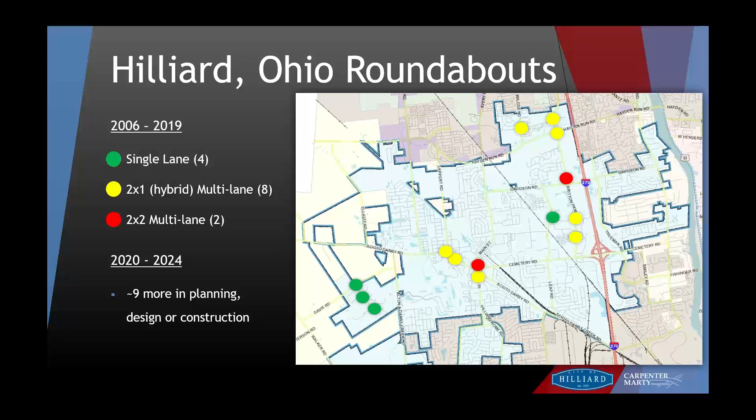So I want to take a second to look back here in the United States. The first modern roundabouts in the US were built in the early 1990s, and the first roundabout guide, published in 2000, was based heavily on either international experience or very limited US experience. But roundabout guides take a while to research and write, so by the time they're published, there's probably new information out there.

In Ohio, our Manual of Uniform Traffic Control Devices, the 2005 edition, actually had very little information in it about roundabouts. So when I look back, we first started dipping our toes into roundabout design around 2004, and a lot of the guidance we were working off was probably already outdated.

Fast forward to 2010, when NCHRP Report 672 was published, the second edition of the Roundabout Guide. Again, the information in that published document probably still had very limited experience and data for some of the more complex roundabouts we're starting to see now.

And again, the OMUTCD 2012 edition—we're really lucky to have a lot more information in there, some great updates on roundabout design guidance. But it's really important that we never use these guides as prescriptive, as in 'do these things a certain way,' because roundabout guidance is constantly evolving. We all need to stay up on what's going on, what research is happening, and talk with each other. These webinars are great opportunities to do that, and to always be making changes in how we do things to do a better job.

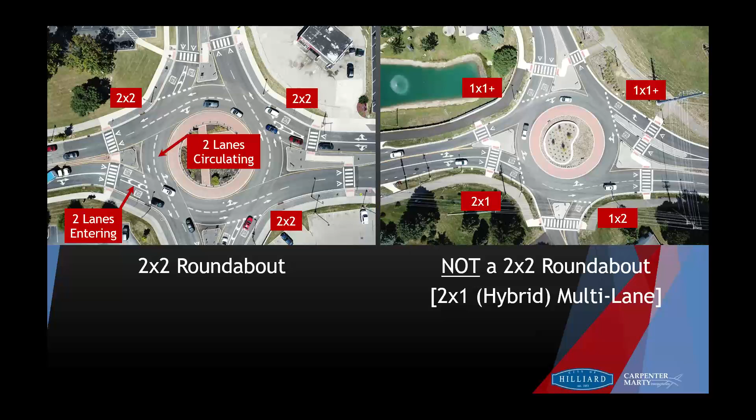Roundabouts are a safer choice. I think most of us on this webinar probably very much believe in this. I absolutely think that when you look at trying to create a more forgiving infrastructure for people making mistakes on the road, roundabouts are the way to go. We know they slow people down if designed properly, and we know the angle of impact is much more forgiving. For us, it's a no-brainer.

But when you think about what the public sees sometimes, they're not always differentiating between a single lane or a multi-lane roundabout. They tend to lump them into a good roundabout or a bad roundabout. Early on, there were always these safety stats saying roundabouts reduce crashes by X%. But I think a dirty little secret a lot of us weren't really talking about maybe 5, 6, 7, 8 years ago is this crash problem we're having at some of these multi-lane roundabouts.

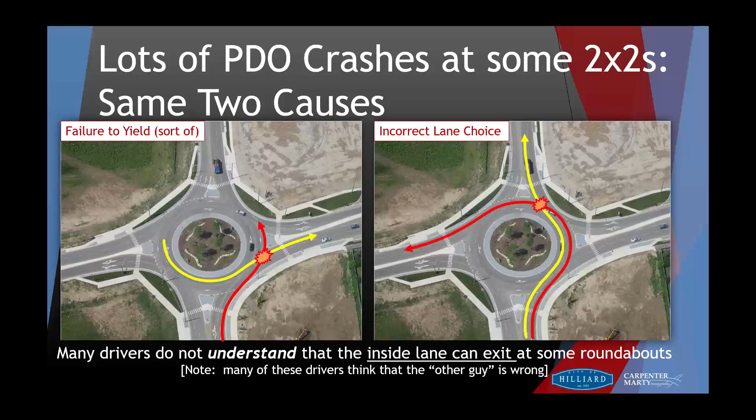This crash problem is actually part of a big research project going on right now. Some of you may have listened to the webinar on Tuesday with Dr. Wei Zhang from FHWA and Justin Bansen, part of the research team with Kittelson. They talked about the pooled fund study. I won't get into that too much, but what we know is that not all 2x2 roundabouts are high crash, but most high crash roundabouts are 2x2s or bigger. So what they're trying to dig into is whether there are commonalities in high crash versus non-high crash 2x2s, to help all of us make good decisions on whether we're setting ourselves up for success or potential failure.

So I'll recap here. Our Metropolitan Planning Organization, MORPC, used to put out a list every year of high crash intersections, the top 100 in our entire region, and they'd also divvy out the top 5 for each community within our MPO. These three roundabout intersections were in the top 100, and our number one location was actually the second highest frequency in terms of crash rate in our entire region. But the great thing is it was the lowest severity. So there are some really good stories here, but having a really high crash rate is not where you want to be.

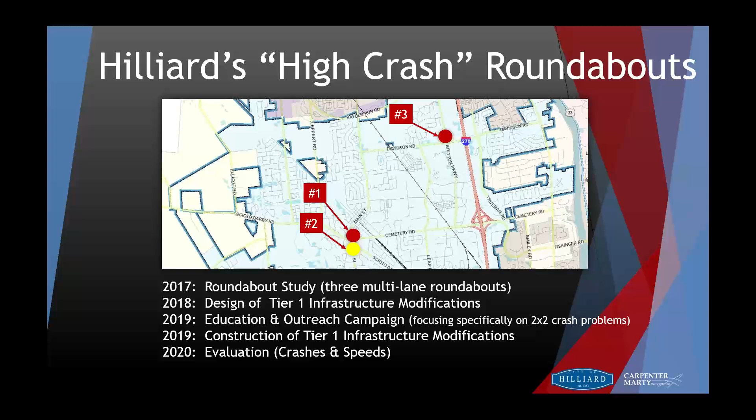Back in 2017 we conducted a detailed study of these three roundabouts, came up with some recommendations for infrastructure modifications, which we designed in 2018. In 2019 we really kicked off a significant education and outreach campaign in our area, and then constructed tier 1 of these infrastructure modifications at all three roundabouts last summer and fall. 2020 is where we are today, and we've been evaluating both crashes and speeds at these roundabouts to see whether our investment was worth it.

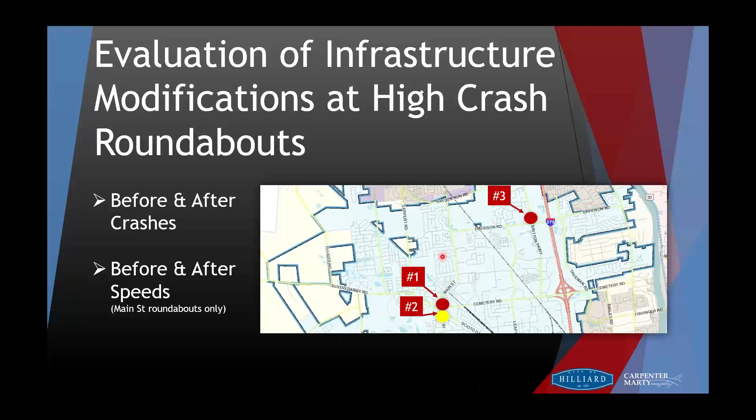I'll talk a little here about that evaluation of the infrastructure modifications at our three high crash roundabouts, looking at before and after crashes as well as before and after speeds at our Main Street roundabouts, which are number 1 and number 2.

What we did here is actually a ghost line—Minnesota DOT may have done something similar to this. It's basically a ground-out, almost like a grind line, to re-emphasize that the inside lane can exit out.

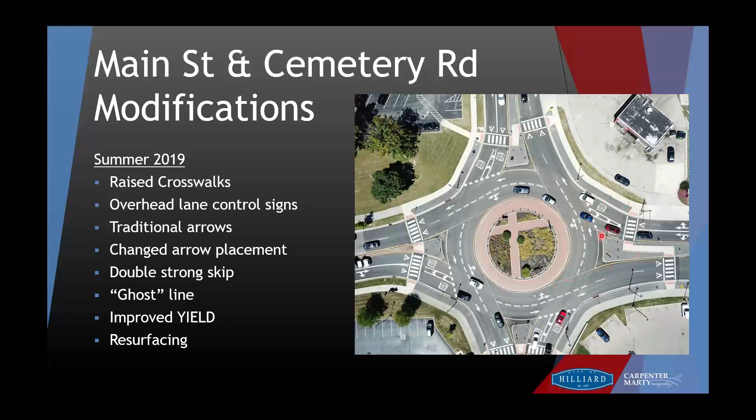We also changed our yield line placement. Through August 31st of 2020 we saw a decrease in crashes, though the first month had some increase. Even before COVID we were seeing a pretty significant decrease in our crashes. We do think there's probably a COVID impact—our volumes are down, our crashes are down citywide—but even factoring that in, we still showed a fairly significant reduction in crashes.

Now I'll go through speeds. These speeds were taken at the entry in advance, and then at the exit from the circulatory roadway, with 85th percentile speeds measured at the exit lane crosswalks. We did place the zigzag crosswalk markings a bit further out, because that seems to be the sweet spot for motorists yielding at the crosswalks. That was our goal.

These speeds were taken in May 2017 during our study, before the infrastructure improvements. These are the same location speeds in May 2020, about 9 months after we made the improvements, and the change is shown here. For those of you who work with 85th percentile speeds, when you have a lot of traffic sustained over a 9-month period, we're pretty pleased with what we did. That said, if you've driven through these roundabouts, you know the raised crosswalks definitely get your attention.

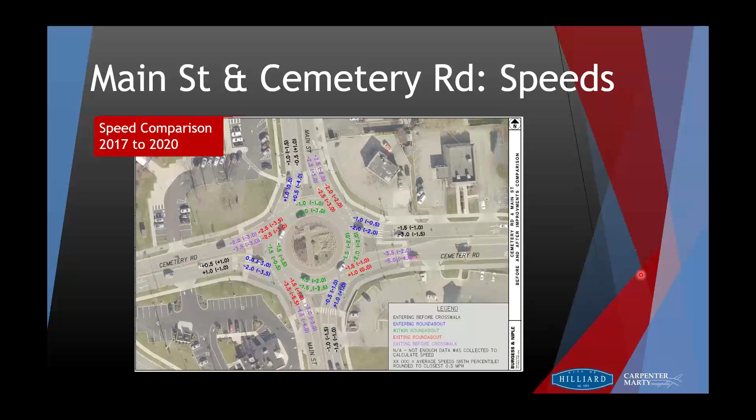I'll talk a little bit more about that later.

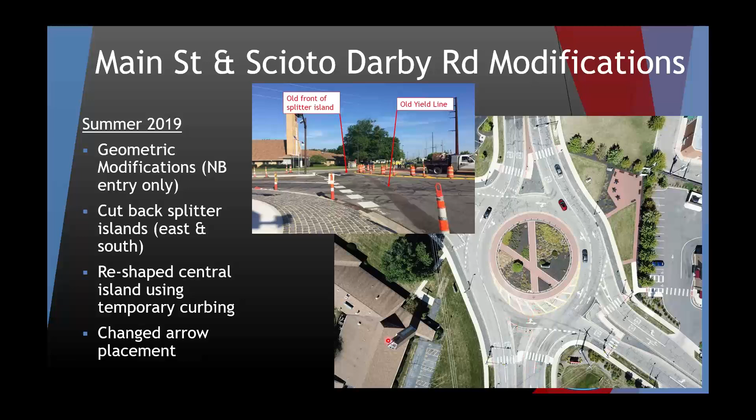So we made these geometric modifications using quick curb. We cut back the south splitter island to try to widen it enough, and it had a pretty significant effect. If you look at the northbound crashes, northbound to eastbound coming into that leg, they actually went down really significantly, since some of the other crashes we've had are at other locations along that roundabout. Not expecting significant change there, but that's really where we're seeing some improvement.

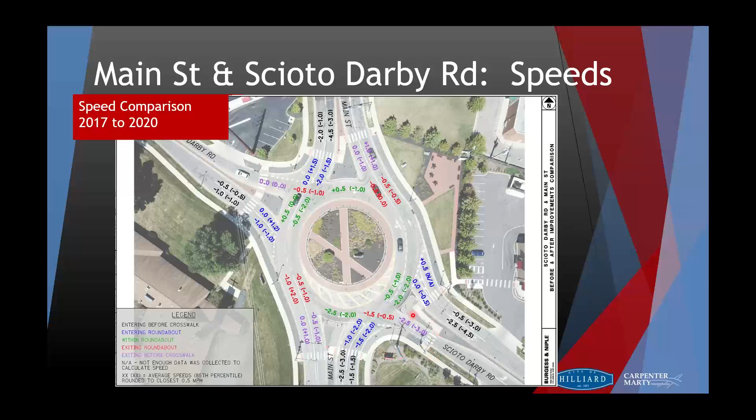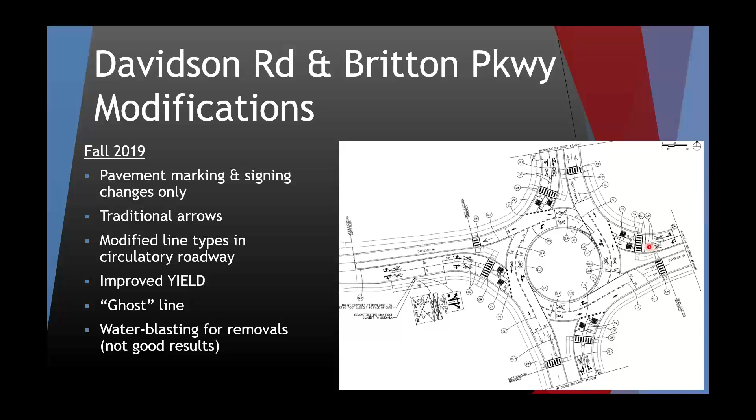There's this one leg that has the left turn lane at 2x2. So what we did here is we did not do resurfacing, just signs and pavement markings only, and we did not invest in overhead lane control signs. We modified some of the circulatory markings and got rid of the fish hooks, which isn't too bad for a Hilliard roundabout. So here's our big picture here.

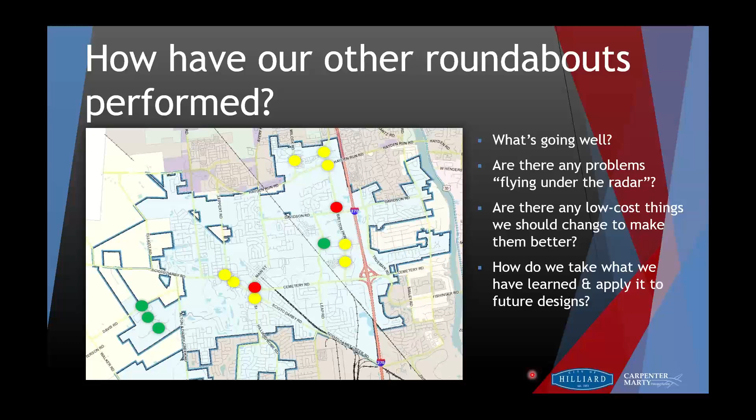So overall pretty pleased. One thing is, we've spent years on the squeaky wheel, what's shouting at us on our Main Street. Are there things going well that we need to take note of? Or are there problems flying under the radar that we're really not seeing? We do a lot of different task order type projects for us, diving into all of our roundabouts to look at crash frequency, crash overview, ICDs, lane configurations, and come up with conclusions and recommendations to help us do better in the future.

So I am going to pass over to Gina, and she's going to take it over from here.

Letty, we actually have some questions that have come up, so I don't know if you want to cover some of those now. Yeah, let's look here.

All right, so I see one question: is the ghost line like a pavement construction line? It's actually able to be seen. The idea of this construction line almost reminds me of a removal of a pavement marking line within a construction zone. We all know that when the pavement's wet or when it's dark, the regular pavement markings don't always show up, but we tend to use those grind lines as guidelines.

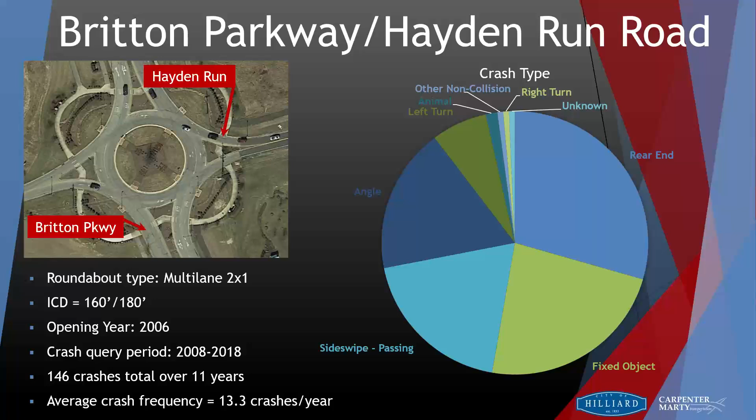There were 146 crashes total over those 11 years, that's 13.3 crashes per year on average. Looking at that data spread out a little bit, we had a lot of crashes in 2008, and it kind of wavered through the years, but the last 3 years of data are really the highest 3 years we have. The crash types were spread out through rear end, fixed object, sideswipe passing, and angle crashes.

Crashes per hour, you can see a bit of a peak during the morning rush hour, a lot spread out throughout the afternoon, and then another peak during the evening rush hour. As is typical with a lot of these roundabouts, we have a lot of property damage only crashes.

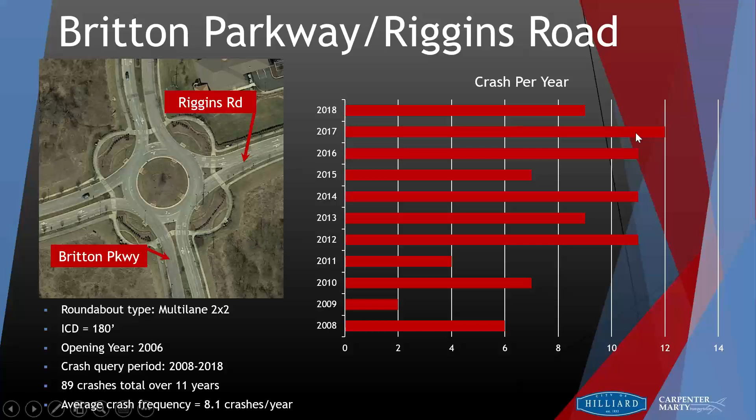Moving on to our next one at Britton and Riggins, this was a multi-lane 2x2 with an ICD of 180, an opening year of 2006. Over the 11 years of data we had, there were 89 crashes total, not as bad as the last one, but still pretty notable. This one shows increasing crashes over the years. Crash types were spread out by sideswipe passing, fixed object, left turn, and angle crashes.

Crashes per hour, again, some peaks throughout, an afternoon peak here, and then your evening rush hour. And again, a lot of property damage only crashes.

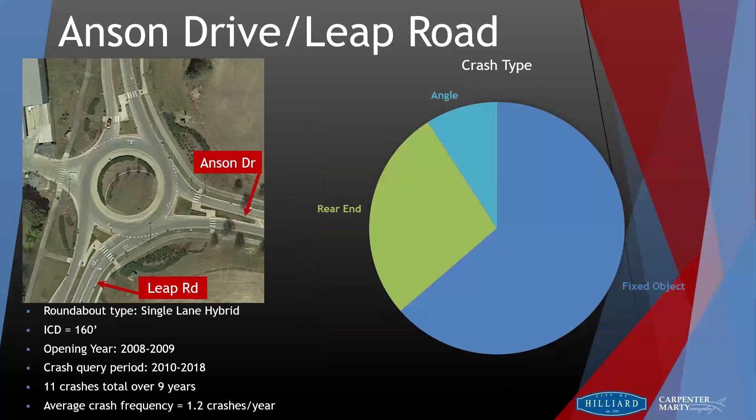Moving on to hybrid with an ICD of 160, an opening year of about 2008. Over 9 years of data, we only had 11 crashes. So this one's pretty good at 1.2 crashes per year on average. It's a little harder to see trends from about 1 to 2 crashes per year, rear end and angle as well.

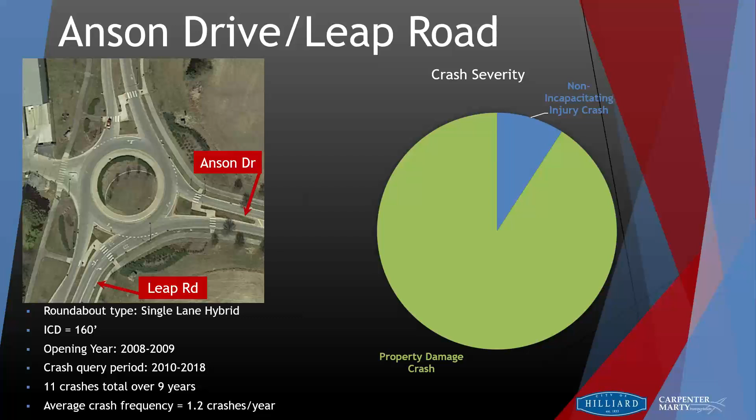Crashes per hour are kind of spread out. And again, a lot of property damage only crashes. So this roundabout, maybe not one that we're really worried about.

Britton with an ICD of 180, an opening year of about 2000. There were 43 crashes total, that's 4.7 crashes per year on average. Looking like an increase in crashes throughout the years. A lot of fixed object crashes at this one, with some angle, rear end, and sideswipe passing.

A definite peak here between 4 and 5 p.m. And then again, a lot of property damage only crashes.

At Britton and All Seasons, this was a multi-lane 2x1 hybrid with an ICD of 160 and 180, an opening year of 2013. 13 total crashes over 5 years of data, so that's 2.6 crashes per year on average.

This one was a little different. It seemed like we had more crashes the opening year, and then it kind of leveled out at 2 crashes per year after that. Crash types were pretty spread out as well, with some sideswipe passing, rear end, fixed object, and angle crashes.

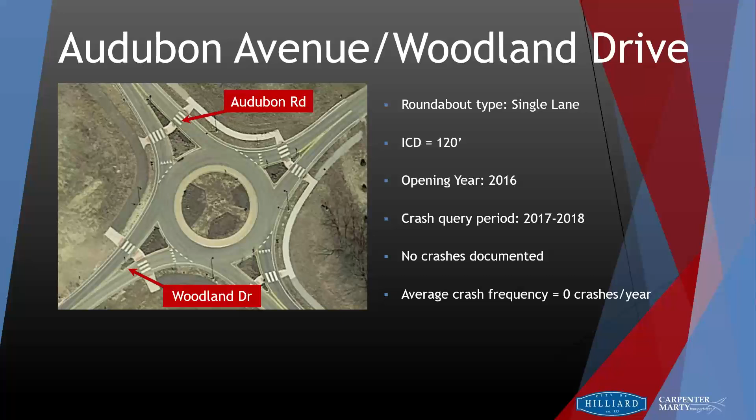Okay, now we're getting into more of our newer roundabouts. This one at Audubon and Woodland with an ICD of 120, opening year of 2016. There were no crashes documented at the time we pulled crashes, so everything's looking good at this one.

Same thing here at Audubon, Marshview, and Blue Heron. It's a single lane with an ICD of 120 and an opening year of 2016. No crashes to speak of here. Everything looks good.

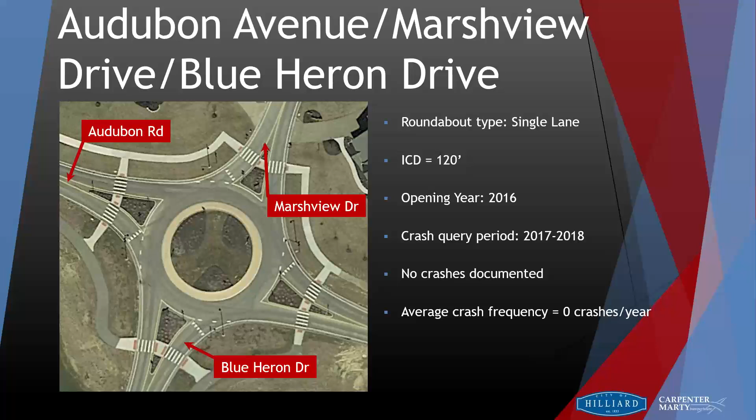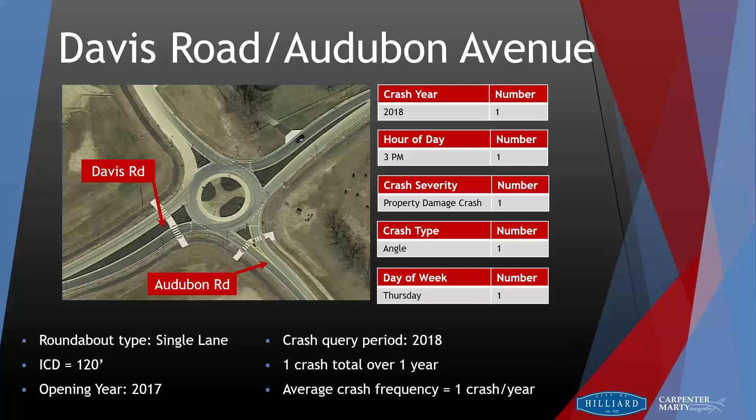At Davis and Audubon, this is another single lane with an ICD of 120. There is one crash that has occurred here, but it was a property damage only crash.

At Riggins and Wilcox with an ICD of 160 and 180, an opening year of 2017, there have been 2 crashes here, both property damage, one rear end and one being sideswipe passing.

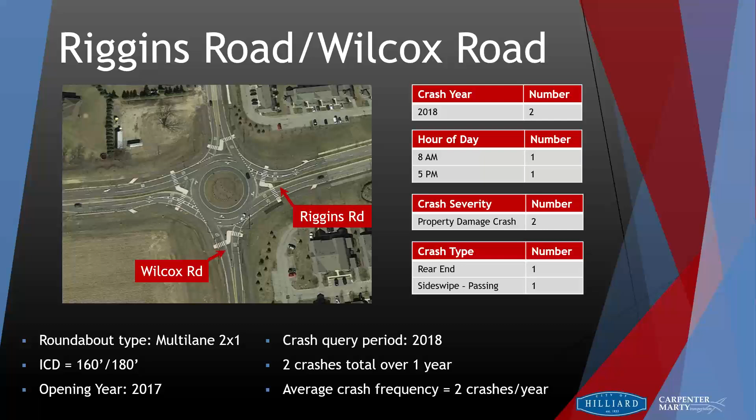So, I know that was a lot, but of all that came to the top, we decided we really needed to take a deeper dive into these 3. Coincidentally, they were all on Britton Parkway. So we have Britton and Riggins, Britton and Hayden. This brought us to task 2 crashes.

The first 2 I'm going to walk through side by side, being Britton and Riggins, which is here, and Britton and Anson, which is down here, because you'll see these 2 roundabouts are very similar, had very similar issues, and we got to the same conclusion on each. So trying not to repeat myself, we're going to go through them starting in the year 2006. This is one of the original roundabouts in the city.

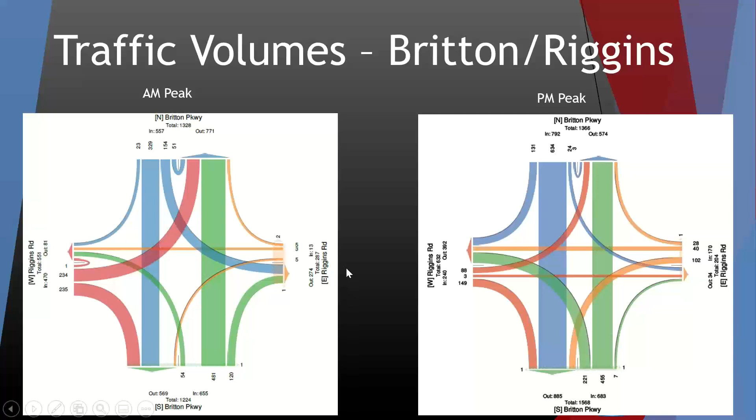You can see we have a lot of traffic north-south on Britton Parkway, and generally more traffic on the west leg compared to the east leg. But generally, Riggins Road is more low volume compared to Britton Parkway. Again, taking a look back at Riggins Road, when this was constructed, we were planning for a lot more development. It was constructed as a 5-lane section.

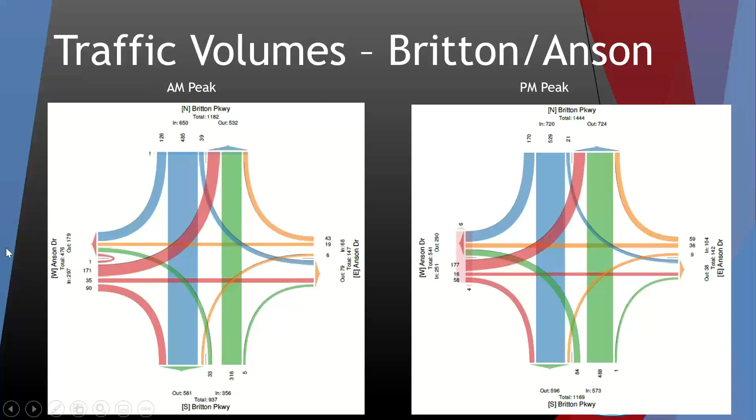And here's our roundabout over here. Looking at the volumes we have inside, this probably didn't need to be a 5-lane section. Ours is low volume compared to Britton.

But we conducted our analysis using both Sidra and HCS just so we could compare the results and make sure we were making the most informed decision here. And we used 2019 and 2029 volumes.

So we went through a bit of an iterative process here. I'll walk you through diving into our brains, how we went through this. So the first alternative we looked at was: what is the absolute minimum number of lanes that we can make this roundabout, that we can still have acceptable capacity? Can we make this a single lane circulating roundabout and everything still function okay?

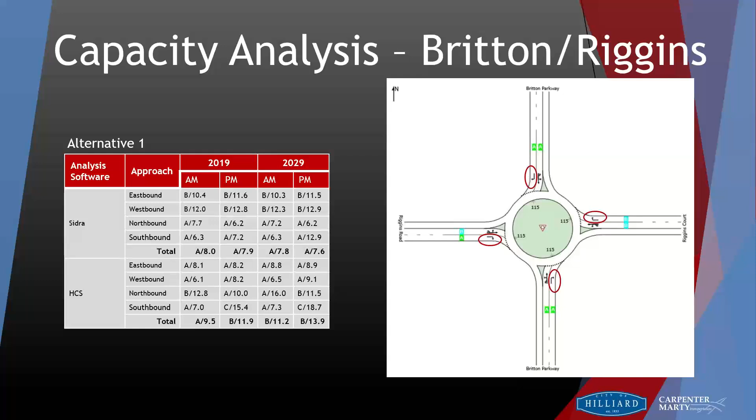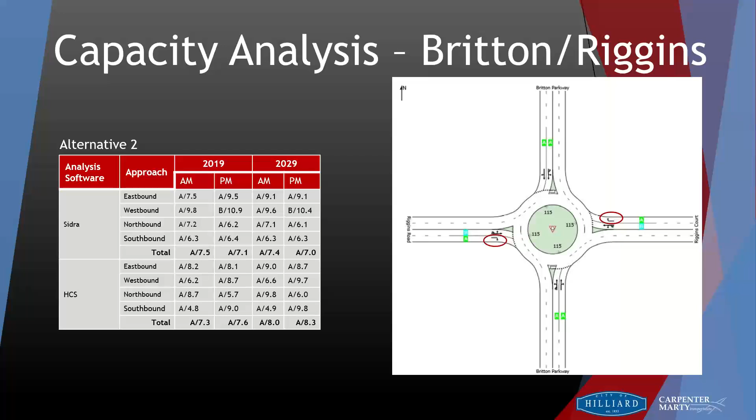So that brought us to alternative 2: let's just convert the Riggins approaches. Obviously capacity is still the same, same methodology with Britton and Anson. So existing conditions, A+ all around, everything looks great, but is this roundabout larger than it needs to be? Are we providing more capacity than it needs?

Alternative 1: can we make this a single lane circulating roundabout? Let's convert the rightmost lane to be a right turn lane only and keep a single lane approach. That one's fine.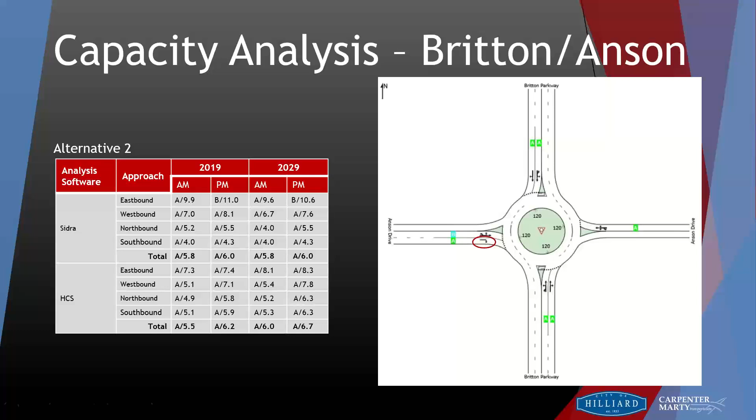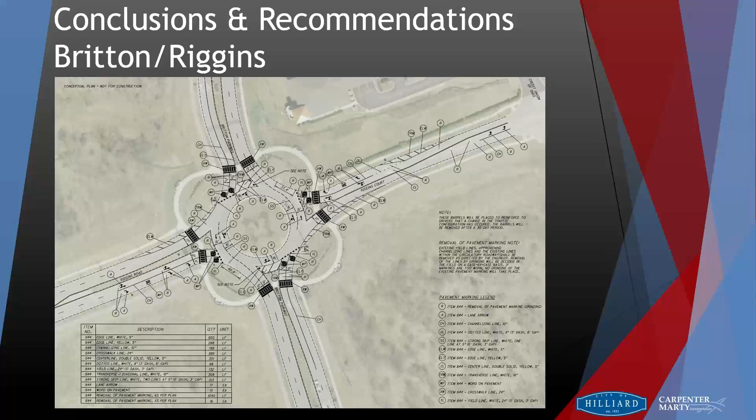Overall, this brought us to some short-term, low-cost restriping plans for both of the roundabouts. By restriping plans, we mean all we're doing is changing out the pavement markings. We're not moving any curb lines whatsoever. This is basically implementing alternative 2 that we talked about.

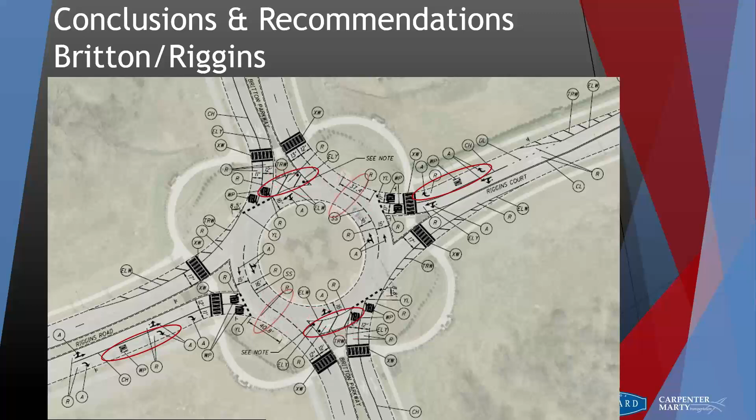This was a multi-lane two-by-one with an ICD of 160, 180, and an opening year of 2006. So again, one of the city's original roundabouts.

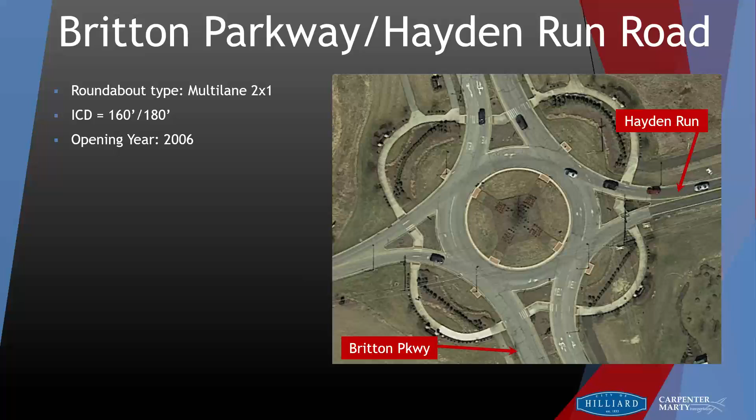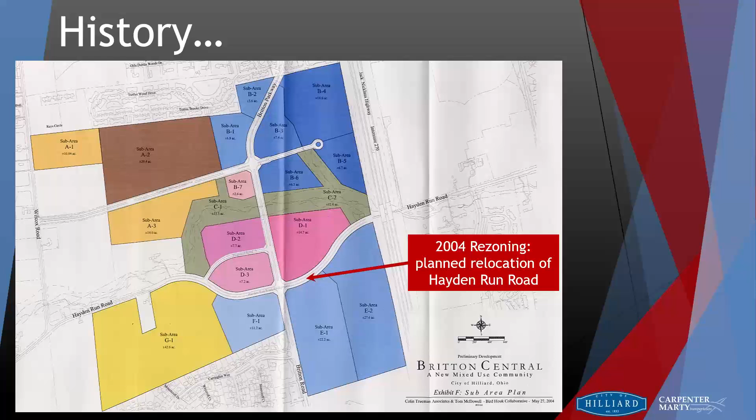Looking back at the history here, this was a sub-area plan from back in 2004. The 2004 rezoning showed a planned relocation of Hayden Run Road, basically dipping it down south, with a planned development around here.

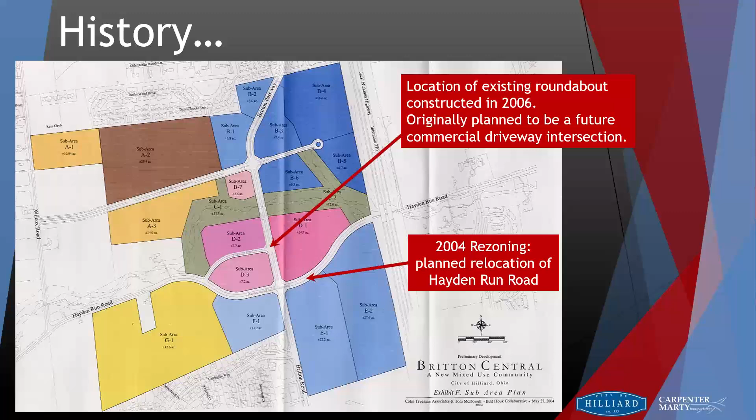This is actually the location of our existing roundabout that we're talking about, constructed at a commercial driveway intersection. If you know anything about Hilliard, if you drive through at 45 miles per hour, vehicles are coming in hot, which affects the crash data.

So kind of what Letty was talking about before. We also expect it's because drivers were accepting a smaller gap than what was needed, due to the frustration of sitting in those long queues we mentioned. We've all been there — you're waiting in a long line of traffic, you finally get to the roundabout and think, okay, I'm not going to wait here long, I'm just going to go when I find a gap, even though it may not be long enough.

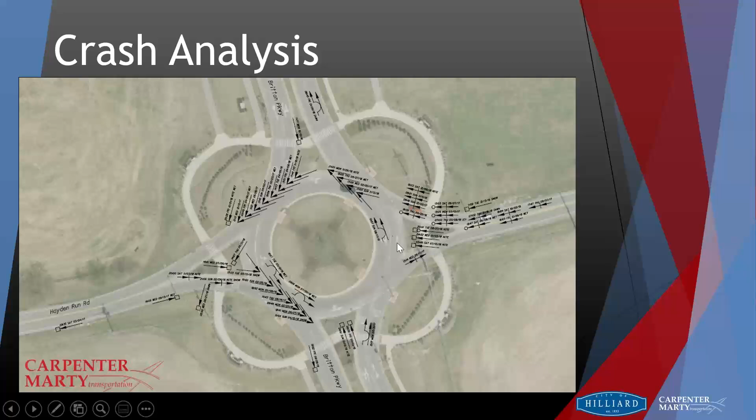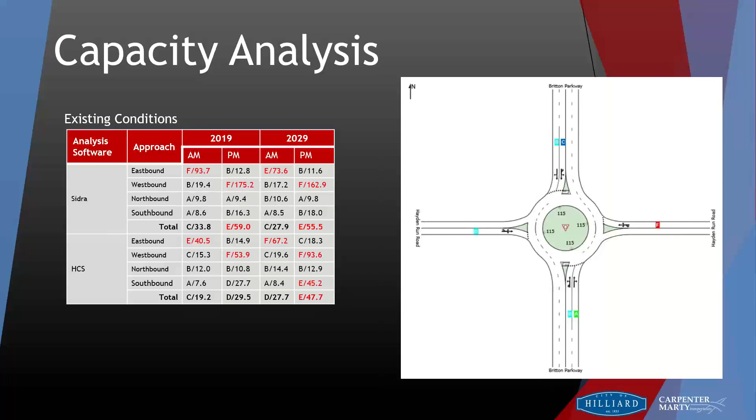Same thing, I'll walk you through a bit of an iterative process we went through — really just testing out the different lane combinations we can look at here, seeing what we can do for improvements in the future. Our first alternative was really just to determine the number of lanes necessary to address these capacity issues we're seeing in the existing conditions. That involved adding a right turn lane on the east end, but we're really okay with that for now.

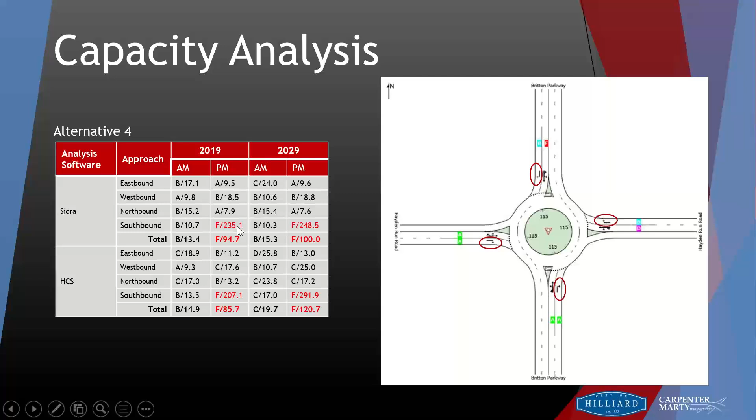Alternative 4, we looked at taking Britton north-south, converting that rightmost lane to be a right turn lane only, and then adding right turn lanes on the east-west approaches. This fixed our capacity issues on the east-west approaches, but this issue surfaced on the southbound approach. So again, not something we could recommend.

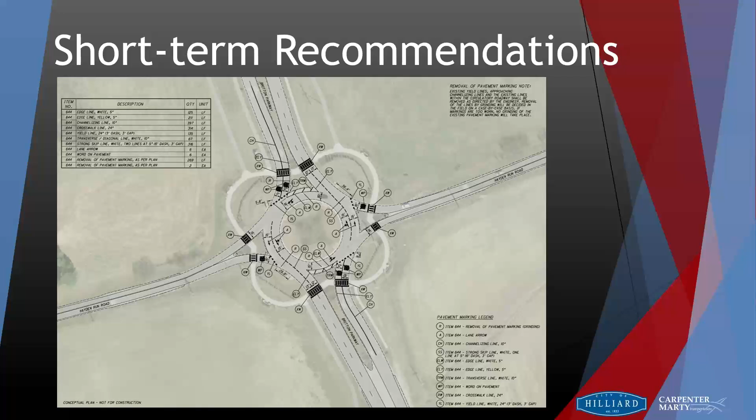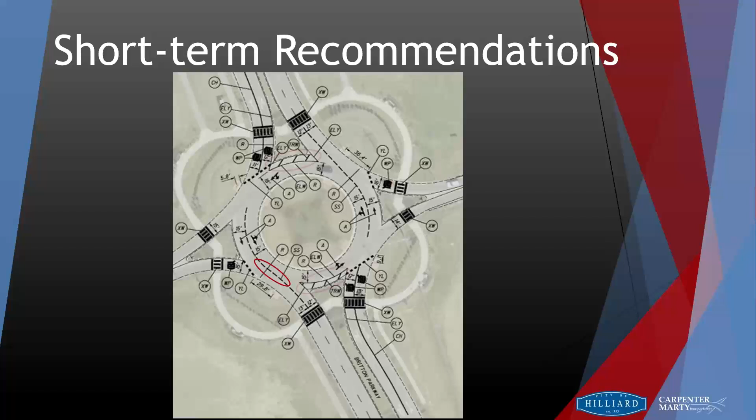So overall, this brought us to a pavement marking upgrade that we could do right now, and another option being more of a long-term improvement that the city can plan for in the future. This was just the pavement marking improvements, again not moving any curb lines, adding the strong skip lines a little bit more to the east-west corridor.

A lot of these are capacity issues at some of these. And the other thing that kind of compounded it: if you have a speed related crash and you hit a light pole and it keeps getting hit, our operations guys have to keep putting this light pole back up, which then led to some dark conditions, which could have been contributory to some of the other problems and the fading pavement marking. So it all sort of starts to snowball a little bit.

But one thing that came out of this, that we've learned and changed some of our standards on, is really looking at light pole placements. We used to put our light poles 2 foot behind the back of curb, and now at our roundabouts, we're definitely putting them 4 to 6 foot back. I'd highly recommend that, because even with a small fender bender type crash, if somebody hits one of the light poles, it's probably going to fall down. So getting them back a little further is a good thing to do.

And then also, when you think about these speed-related crashes, look at most of those Britton Parkway roundabouts, even the ones not having a high number of crashes because they're maybe 2x1s. The 180 ICD was kind of where we used to start for the 2-lane configurations. Rethinking that, it shouldn't be our starting place anymore, but it was back then.

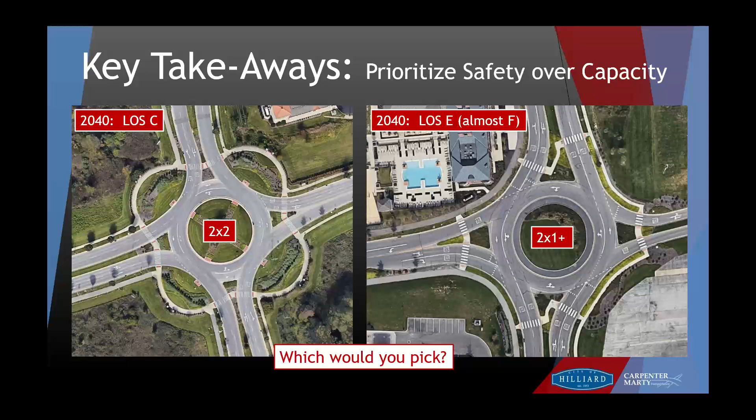Fishhook markings, I've made this pretty clear. I think when we've talked to a lot of drivers in our study, I got some comments like, what are those squiggly lines? You got to think there's so much to process at a multi-lane roundabout when you're coming into them. And you want drivers to be able to quickly look at something and process it really quickly. And when you have something different, it's harder for them to understand it. A traditional arrow is something they're very familiar with.

Overhead lane control signs. So I'm not saying you should do these at all roundabouts by any means, but clearly the overhead lane control signs are so much easier to see, and it helps people get positioned in the correct lanes sooner. So I would say, if you really do need a 2x2, you probably really need to include the overhead lane control signs. At least that's what I would do.

So raised crosswalks. Where we put them in on our Main Street corridor is a pretty high pedestrian corridor. It's a block or two from our historic district. It's also within a school zone where about 1,600 students attend, in grades K all the way through 12. There's 4 different schools, so we had a pretty high pedestrian environment. So I do think they are a really good tool in the right location. They do help to address some of the ADA accessibility issues.

But some really important key things: collect your data. Get your speed data so you know where you are beforehand. And this is an important one: you really need to make sure that you have political support and thick skin, because guaranteed, if you build them so that they're effective, you are going to get some flack from drivers about it, because let's face it, people want to be able to drive as fast as they want, and they don't want to slow down.

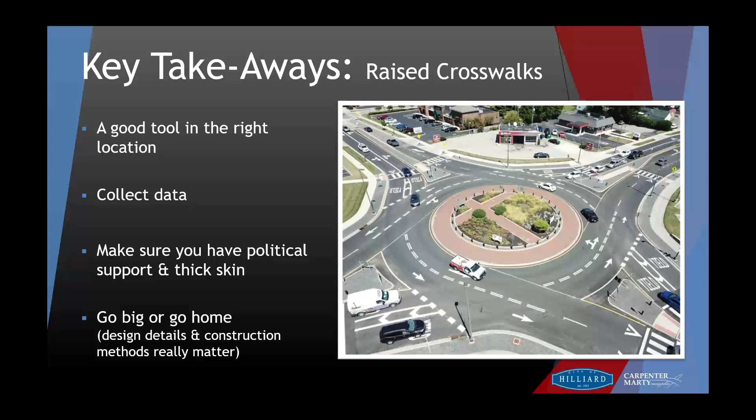A couple other things. I'm not a designer, I don't design roundabouts, but I know things that have changed over the years. In the late 2000s, we seemed to be having a lot of problems with path overlap, some related more to the radial type design. As we started building more 2x2s, or at least 2-lane entries, this problem started popping up. So the solution was: we need to increase deflection and also increase tangents on the entries. But through this, I think we've kind of created this feeling of merge on the entry, which goes back to human factors—do drivers really understand that they yield, or do they just think they can merge right into that outside lane?

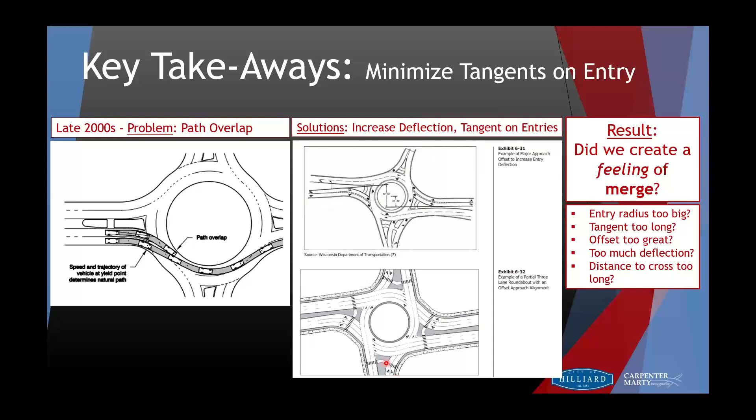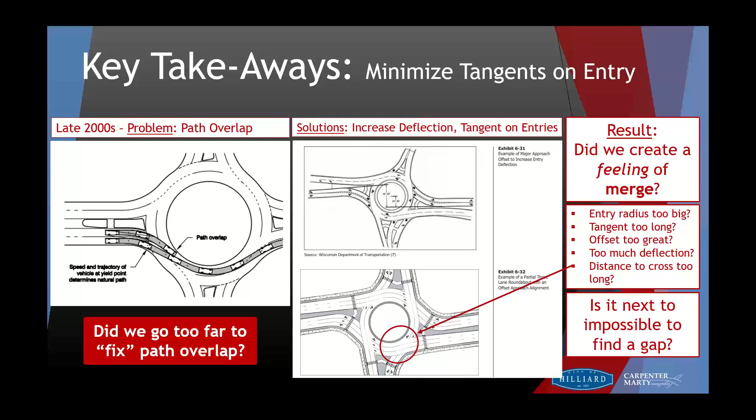So these are questions I pose: Is the entry radius too big? Is the tangent too long? I think sometimes it is. Is the offset maybe too great? Is the distance to cross too long? This is kind of important—if you really need a 3-lane circulating roundabout, what's the likelihood that during a peak hour someone's actually going to find gaps in all three lanes at the same time to get across? Because it's really a long distance to cross. So really, did we go too far to fix path overlap? Maybe. I'm kind of a Goldilocks person—you need to figure out that happy medium.

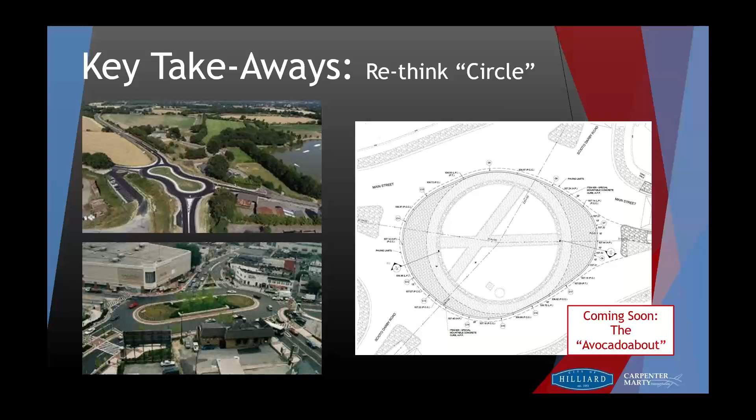A lot of us are also rethinking the circle. We tend to start with a circle, but I know Hillary Isebrands, in her training sessions, talks a lot about how it doesn't have to be a circle. There are dog bones, peanuts, and ovals, and coming soon to Hilliard, Ohio in 2021, I'm going to name it the avocado-about, because it really looks like an avocado. So I'm thinking I might bring my margaritas and chips and salsa out here when it opens up, just to celebrate.

Obviously, those of you that know me know education and outreach is something I'm very passionate about. I think it's really important that we can't assume drivers know how to drive a roundabout, especially a 2x2. One thing we realized is we really need to keep it short, sweet, and simple. In the age of social media, if you have a 3-minute long video, I can almost guarantee people are not going to watch it. It might be a great video, but unless it's really funny and entertaining, most people are going to check out. So we chose to focus on 3 things: yeah, we know people need to slow down, yeah, we know you need to look to the left, but that's not what people were screwing up on. People were screwing up on getting into the incorrect lane and not yielding to both lanes. So those were our key focuses, and obviously, anytime we're talking roundabouts, we want folks to yield to pedestrians.

So I'm often asked, given all the pain and heartache we've gone through over the last almost decade, would I do it again? At this particular location, with all these schools and so close to our urban core, downtown Hilliard district, I think I would do it again. I would do it differently, but I would still do this 2x2.

Because the option was like a 6-lane section, and that's certainly not what we want in the heart of our town. So we've got something that, while not perfect, I think it manages a lot of traffic pretty doggone well, slows people down, and it looks nice. So yeah, I think I would do it here.